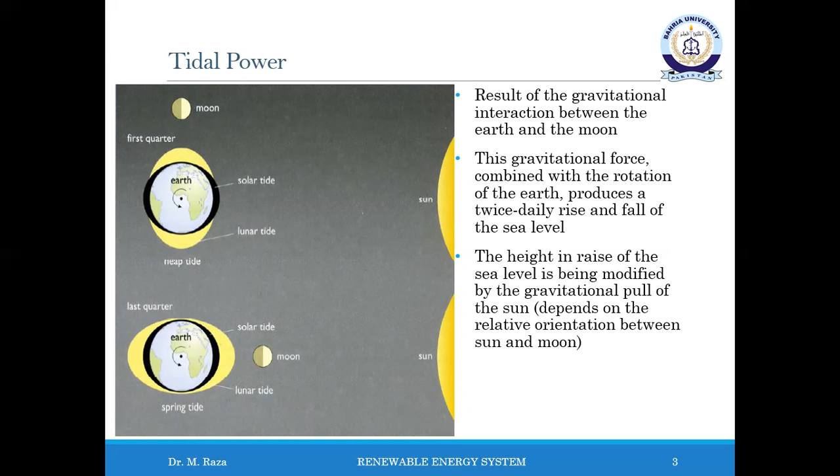There is thus, to summarize, a small centrifugal force and an increased lunar pull acting on the sea facing the Moon, and a larger centrifugal force and a decreased lunar pull acting on the sea on the other side of the Earth. The end result, on the basis of this analysis, is essentially a rough symmetry of forces, small and large, on each side of the Earth, producing a tidal bulge of roughly the same size on each side of the Earth.

In practice, the bulge may differ significantly due to the tilt of the Earth's axis in relation to the orbit of the Moon and to local topographic effects. If Earth were not rotating and the Moon was fixed, then the bulge would remain in the same location on Earth. Relative to the Moon, the bulge stays fixed along the line connecting Earth and the Moon,

but Earth rotates approximately every 24 hours. In 6 hours, the near and far locations of Earth move to where the low tides are occurring, and 6 hours later, those locations are back to the high tide position. Since the Moon also orbits Earth approximately every 28 days and in the same direction as Earth rotates, the time between high and low tides is actually about 12.5 hours.

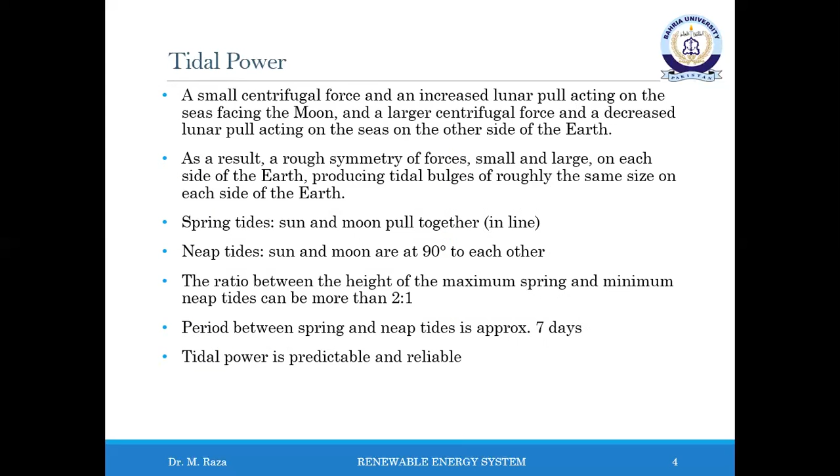The basic physics and engineering of tidal barrage power generators are relatively straightforward. Tidal barrages built across suitable estuaries or bays are designed to extract energy from the rise and fall of the tides. Using turbines located in water passages in the barrage, the potential energy due to the difference in water level across the barrage is converted into kinetic energy in the form of fast moving water which passes through the turbine. The spinning turbines then drive generators to produce electricity.

The average power output from a tidal barrage is roughly proportional to the square of the tidal range. For average power potential calculation, consider a rectangular basin with a constant surface area A behind a barrage and a high to low tide range H. In conventional ebb generation, when the tides come in, the water is freely allowed to flow into the basin. But when the tide goes out, the water in the basin is held there at the high tide level. When the sea has retreated to its low tide level, the surface of the water behind the barrage will be at a height h above the sea level.

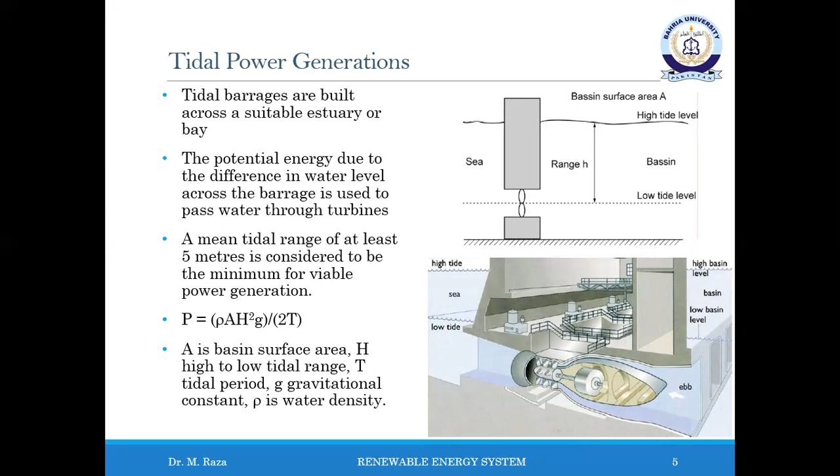Energy can be generated from a barrage in three main ways. The most commonly used method is ebb generation. Here, the incoming tide is allowed to pass through the barrage gate. The water is trapped behind the barrage at high tide level by closing the gate. The head of water then passes back through the turbine on the outgoing ebb tide in order to generate energy. Alternatively, flood generation uses the incoming tide to generate electricity as it passes through the turbines mounted in the barrage. In each case, two bursts of energy are produced in every 24.8-hour period.

During the flood tide, the gates and turbines are kept closed until a substantial hydrostatic head has developed across the barrage. Once the sufficient hydrostatic head is achieved, the turbine gates are opened, allowing the water to flow through them into the basin. Flood generation is a less favorable method of generating electricity due to the effect on shipping and the environment. These effects are caused by the average decrease in sea level within the basin.

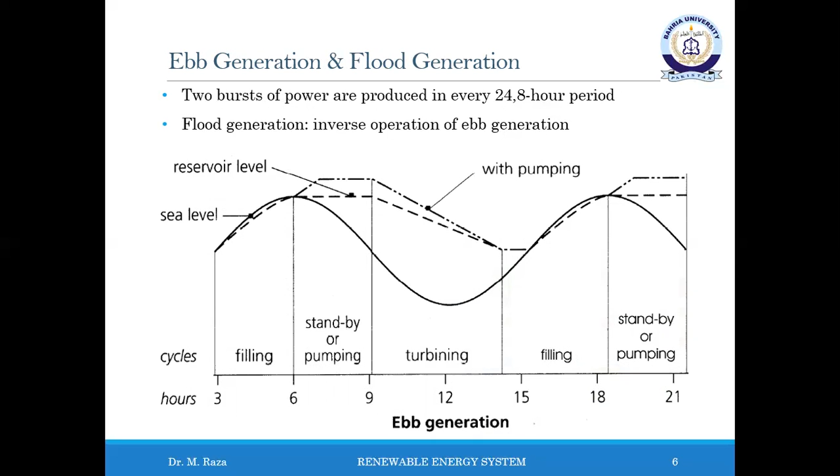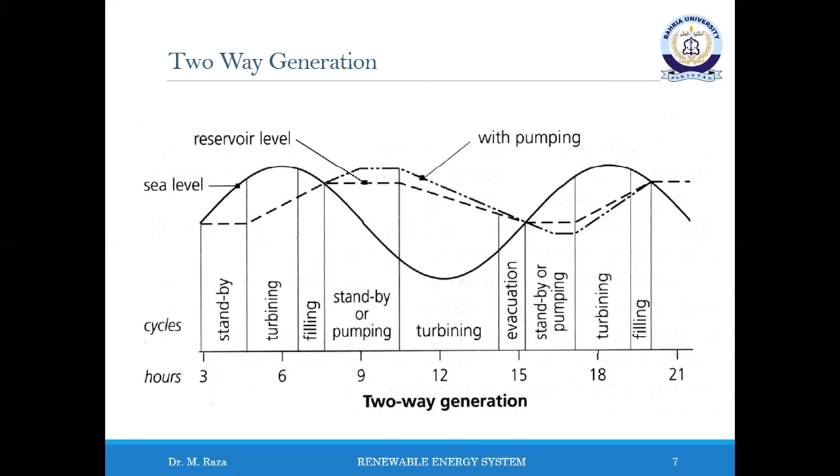Two-way generation has the advantage of a reduced period of non-generation and a reduction in the cost of the generator due to the lower peak power. The electricity produced by a barrage must usually be integrated with the electricity produced by the other power plants that feed into the national grid power transmission network.

With a large, well-developed grid with a large load and many other types of power plant connected into it, this problem might not be too severe, depending on the size of the barrage and the flexibility of the output. The availability of a large amount of electricity storage capacity could also help. Two-way generation on the incoming flood as well as the ebb might offer some advantage, since that would give 4 bursts of power for each 24-hour cycle. But the more complex turbines required add to the cost.

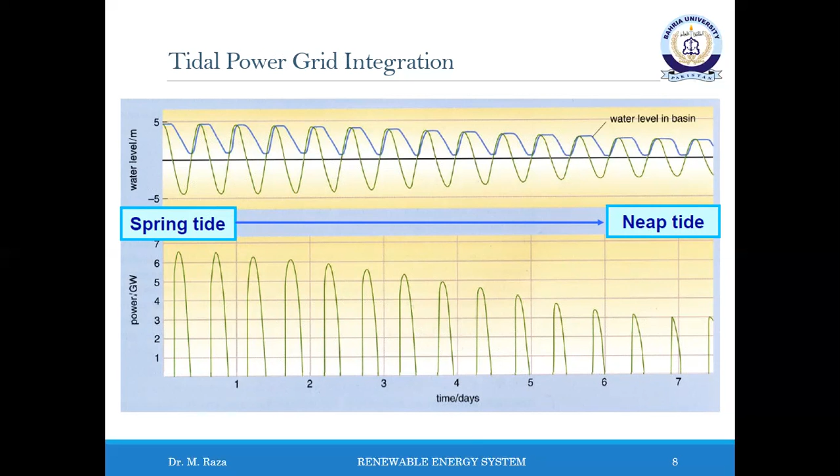The basic technology for power production is well developed, having much in common with conventional low-head hydro systems. A number of different turbine configurations are possible. At La Rance's tidal barrage, a so-called bulb system is used, with the turbine generator sealed in a bulb-shaped enclosure mounted in the flow. As the water has to flow around the large bulb, access for maintenance to the generator involves cutting off the flow of water.

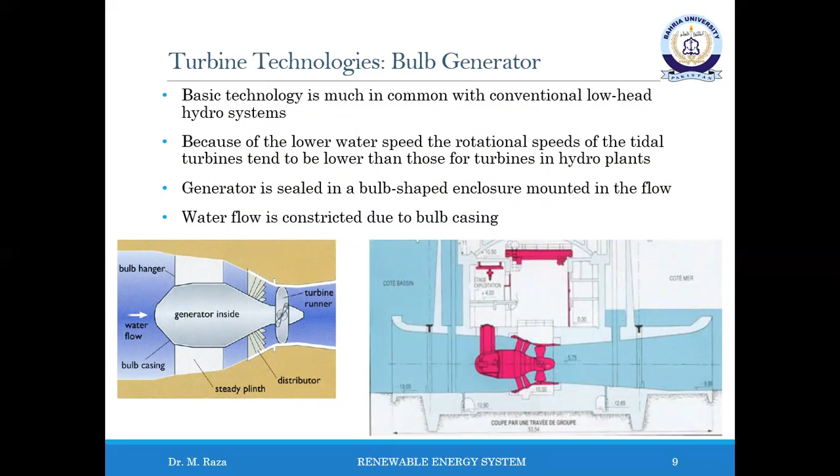These problems are reduced in the rim generator, with the generator mounted radially around the rim and only the runner in the flow. Although it is more efficient than the bulb design because the water flow is not so constrained, this design introduces an extra problem with the sealing between the runner blade and the radial generator.

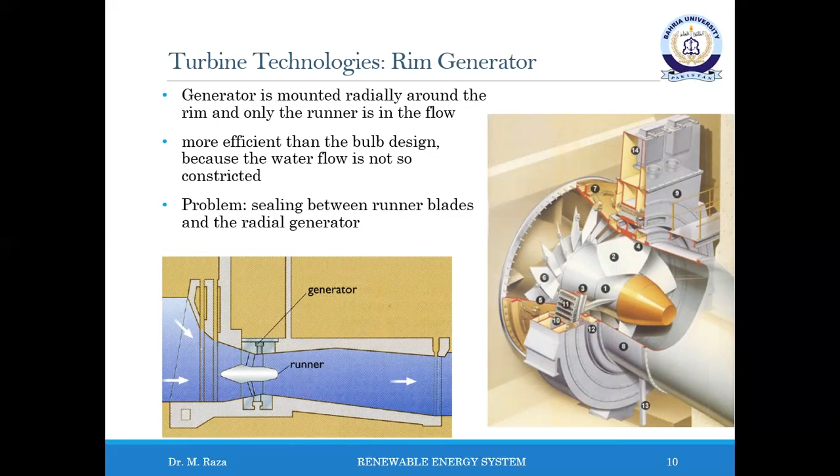Alternatively, there is the tubular turbine configuration, with the runner set at an angle so that a long shaft can take rotational energy out to an external generator. This design also avoids obstructing the flow of water, and since the generator is not in a confined space, there is room for a gearbox, which can allow for efficient matching to the higher speed generators usually used with hydro plants.

The largest turbine of this type installed has a capacity of 25 MW. However, there have been vibration problems in the long drive shaft, and so far bulb turbines have proved to be the most popular with the barrage designer. The rotational speed of the turbines in a tidal barrage tends to be lower than that for turbines in hydro plants, about 50 to 100 rpm, whereas in hydro plants it's 200 to 450 rpm, and therefore wear is also reduced.

Since large volumes of water have to pass through the barrage in a relatively short time, a large number of turbines are required in a large-scale barrage. In a simple ebb or flood generation, this large installed capacity is used only for a relatively short period in each tidal cycle, producing a large but short burst of power, which may not match the demand for electricity.

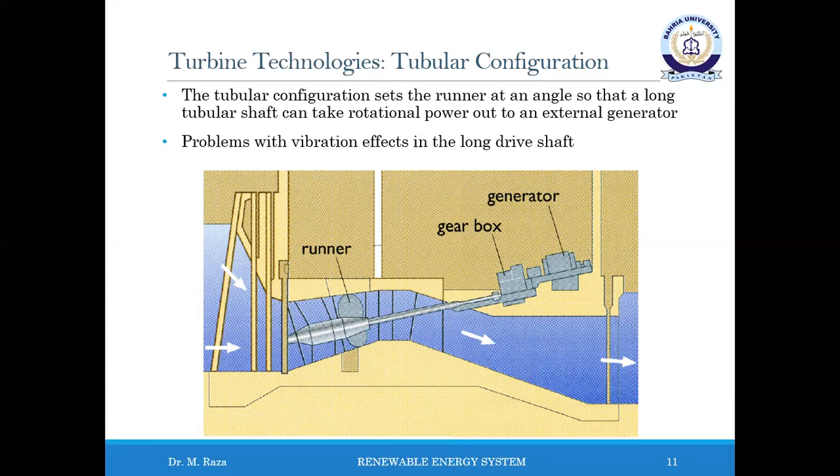However, using reversible pitch turbines, it is possible to operate on both the ebb and the flood in a two-way operation. Reversible turbines are more complex and costly than standard turbines, and although the output will be more evenly distributed over time, there will be a net decrease in electricity output for each phase compared with a simple ebb generation scheme. This is because in order to be ready for the next cycle, neither the ebb nor the flood generation phases can be taken to completion. It is necessary to open the gate and reduce water levels ready for the next flood cycle, and vice versa for ebb generation.

The total power in the tides globally is very large, of the order of 3000 gigawatts. In practice, since there are geographical access and location constraints on siting barrages or other means of obtaining tidal energy, and they also have to be reasonably near to major lines of the national grid, the realistically available resource is much smaller. Some estimates say that the realistic recoverable resource is about 100 gigawatts. Although that is under 12% of the existing global hydroelectricity capacity, it still represents a significant resource.

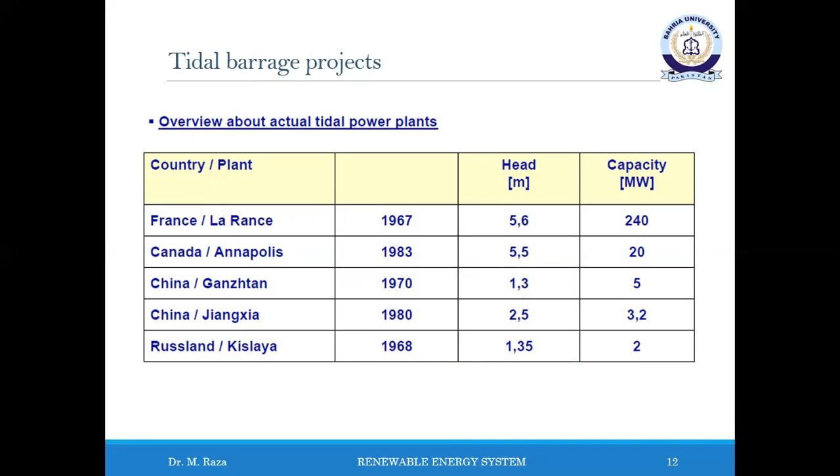A list of a few tidal power plants is shown here. The La Rance tidal power plant was constructed in 1967 in France and has a capacity of about 240 megawatts. There are some other relatively small tidal power plants in China of about 3.2 to 5 megawatts. Note that the capacity of the power plant is large with respect to the small head height. In this diagram, you can observe the design of the La Rance tidal power plant.

The operational pattern initially adopted at La Rance was to optimize the uniformity of the power output by using a combination of two-way generation and incorporating an element of pumped storage. For spring tides, two-way generation was favored. For neap tides and some intermediate tides, direct pumping from sea to basin was sometimes carried out to supplement generation on the ebb.

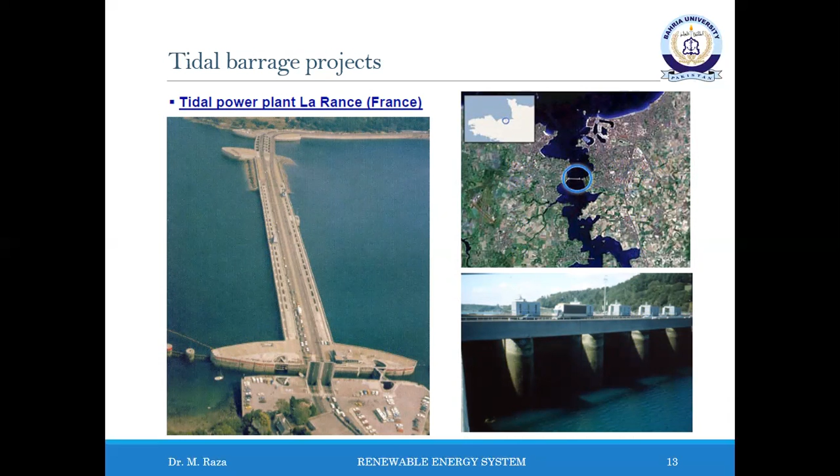The 740-meter long Rance barrage was constructed between 1961 and 1967. It has a road crossing and ship lock and was designed for maximum operational flexibility. It contains 24 reversible two-way turbines, each of 10 megawatt capacity, operating in a tidal range of up to 12 meters, with a typical head of approximately 5 meters, although some mechanical problems were encountered in 1975, which subsequently led to two-way operation mostly being avoided. Overall, the barrage has been very successful.

Typically, the plant has been functional and available for use more than 90% of the time, and net output has been approximately 480 gigawatt hours per year, with in some years significant energy gain from pumping. The construction of the barrage involved building two temporary coffer dams, with the water then being pumped out of the space in between to allow work to be carried out in dry conditions. River water was allowed to pass via gates, but the reduced ebb and flow resulted in effective stagnation of the bay and the subsequent partial collapse of the ecosystem within it. Since construction, exchange of water between the open sea and the creek has restored the ecosystem.

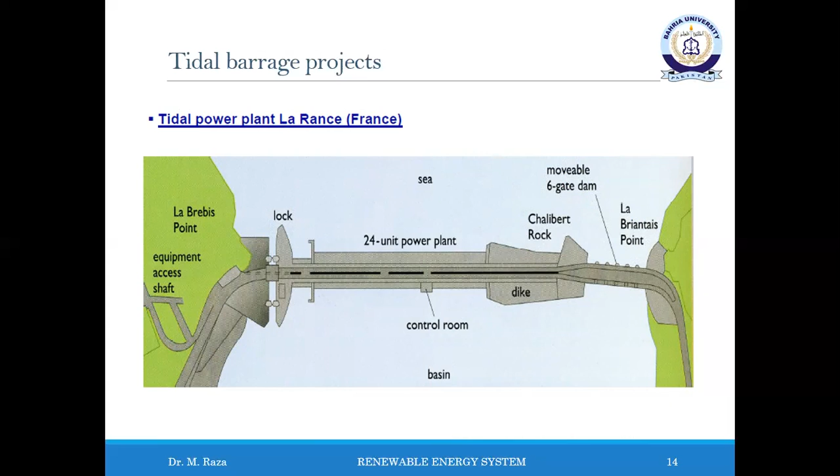Instead of using costly and invasive barrages in creeks to create potential energy head with trapped water, it is possible to harness the energy in the horizontal movement of the tides, that is, the kinetic energy of the tidal ebbs and flows.

In open sea, the speed of the ebb and flow of the tides is relatively low, but restrictions caused by islands, channels, and headlands can significantly accelerate the stream. The enhanced velocity of the tidal stream in these locations concentrates the energy and provides the most cost-effective sites to harness this resource. There are many technologies designed for this, but turbines closely resembling underwater wind turbines have proven most popular with the developers.

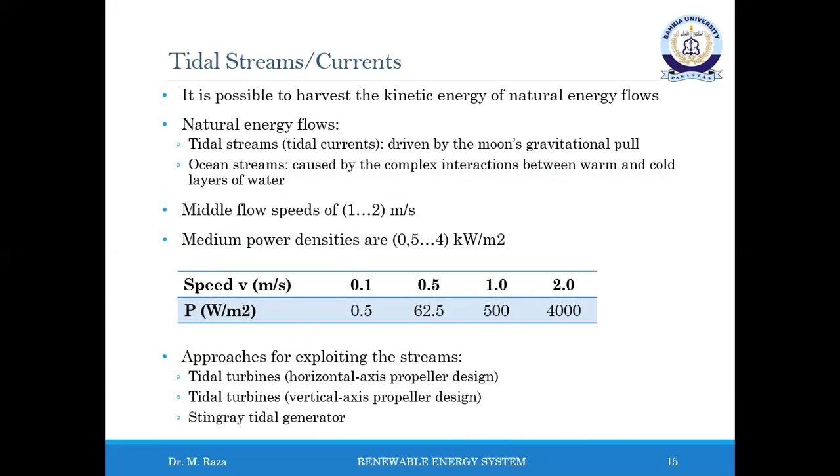The basic physics of power extraction from the tidal stream is similar to that of a wind turbine. That is, half times water density multiplied by rotor swept area and the cube of water stream velocity. A typical horizontal axis propeller design is shown in this diagram. With this structure, turbines can be raised out of the water for easy access.

The most obvious difference between wind turbine and tidal devices is the concentration of energy, due to water being much denser than air. Less obvious is the resulting load fluctuation on the drivetrain and blade from the turbulence generated from the tidal flows interacting with the seabed and other topographical features.

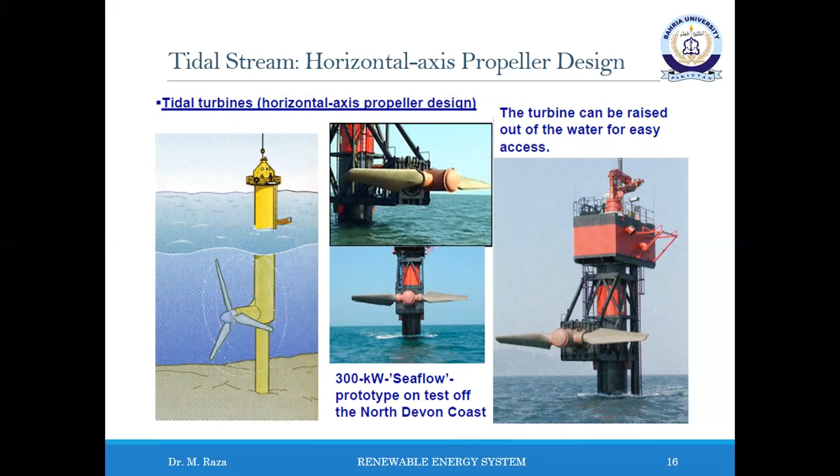Vertical axis propeller type turbines can also be installed to extract the energy from the tidal stream. An EU-funded study has been made of the potential for tidal current generation in the Straits of Messina between Sicily and mainland Italy. This involves installing 100 vertical axis turbines on the seabed at a depth of 100 meters. The concept of a vertical axis tidal stream turbine is the same as a vertical axis wind turbine.

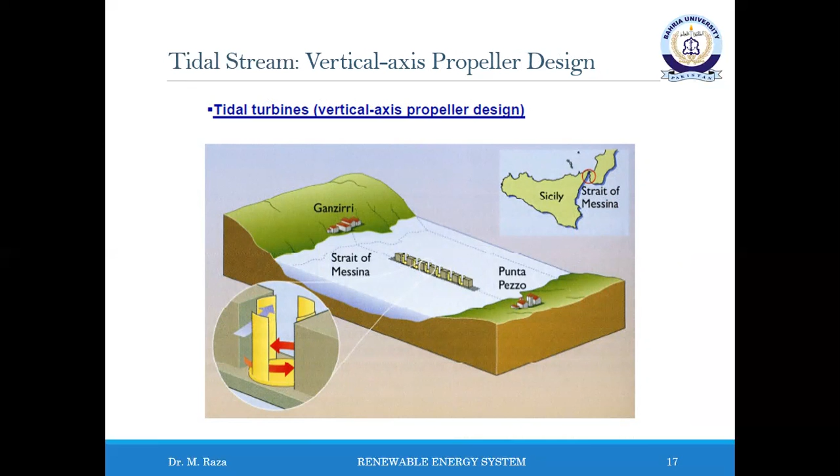Given the relatively shallow depth of most tidal channels, hydroplane type designs are claimed to have an advantage over propeller-like designs in that they can operate in shallower water, with the blade able to traverse a larger cross-section area of the tidal flow than the circular area defined by the rotating blades of the propeller-like devices.

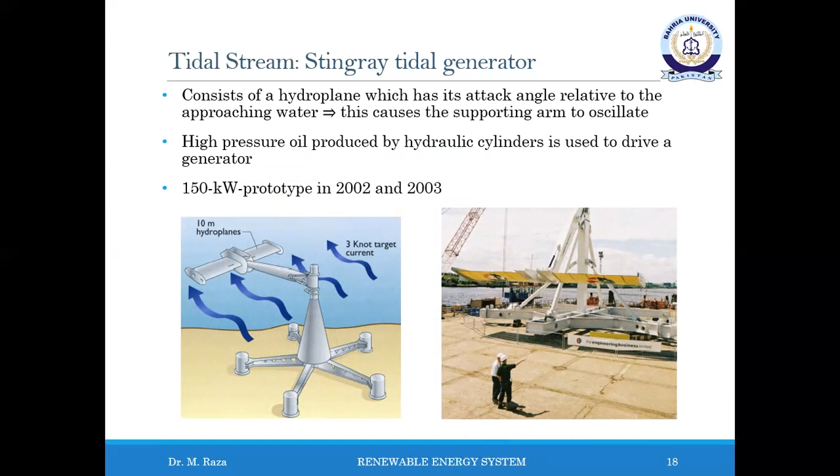The possibility of extracting energy from ocean waves has attracted people for centuries. The modern wave energy conversion schemes have few environmental drawbacks, and the prospects are promising that some of them may make a significant energy contribution. The total wave energy resource is large. However, estimates of its magnitude vary widely as the oceans have not been fully monitored over a long enough time period to establish a reasonable value.

The World Energy Council has estimated the available worldwide resources to be 2000 terawatt-hours per year, if all potential improvements to existing devices are realized. The wave energy potential, for example, in the EU has been estimated conservatively as 120 to 190 terawatt-hours per year at offshore and 34 to 46 terawatt-hours per year near the shore. Here the offshore means deep into the sea.

A rough estimation of technical potential of a few countries is listed here. Denmark has about 2 to 3 terawatt-hours per year of wave energy potential near shore and about 5 to 8 at offshore. Similarly, the UK has a high technical potential of wave power. In Europe, near shore, the UK can produce about 14 to 21 terawatt-hours per year and offshore 43 to 64 terawatt-hours per year.

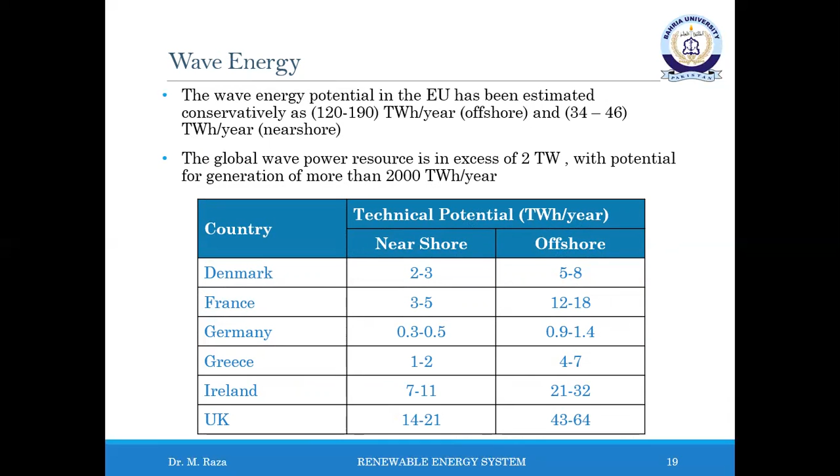Ocean waves are generated by wind passing over long stretches of water known as fetches. The precise mechanism involved in the interaction between the wind and the surface of the sea is complex and not yet completely understood, but three main forces appear to be involved.

Initially, wind flowing over the sea exerts tangential stresses on the water surface, resulting in the formation and growth of waves. Turbulent air flow close to the water surface creates rapidly varying shear stress and pressure fluctuations. Where these oscillations are in phase with existing waves, further wave development occurs. And finally, when waves have reached a certain size, the wind can exert a stronger force on the upwind face of the wave, causing additional wave growth.

Let's start by looking at an idealized wave as shown in this figure. This simple regular wave can be characterized by its wavelength lambda, that is the distance between successive peaks or troughs of the wave. Second, its height, referred to as capital H, the difference in height between peaks and troughs. And last, its period, the time in seconds taken for successive peaks to pass a given fixed point. Waves of greater height contain more energy per meter of crest length than small waves.

Waves located within or close to the area where they are generated are sometimes referred to as wind sea. When wind changes in strength and direction, the resulting wave pattern can become quite complex. Waves can travel out of these areas with minimum loss of energy to produce swell waves at great distance from their area of origin. As the wave travels, there is a systematic tendency for periods and wavelengths to increase, and so swell waves are typically made up of relatively long period waves.

The height and steepness of the waves generated by any wind field depends upon three factors, that is, the wind speed, its duration, and the fetch, that is, the distance over which wind energy is transferred into the ocean to form waves. When the steady wind has blown for sufficient time over a long enough fetch, the waves are referred to as constituting a fully developed sea.

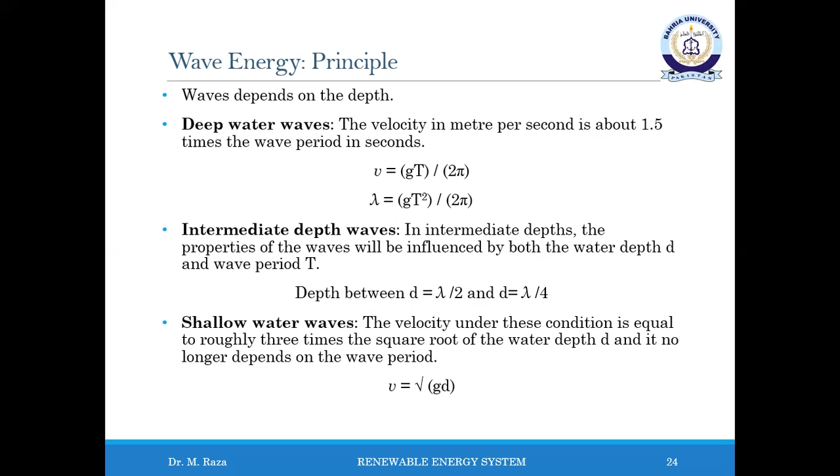There are a few areas in the world where the shoreline is formed by a steep cliff that drops into reasonably deep water. These are the most suitable for shore-mounted wave energy converters because the incident waves have a high power density. But for most coastlines around the world, the near-shore water is quite shallow. Due to the frictional coupling between the water particles at the greatest depth and the seabed, deep water waves gradually give up their energy as they move into shallower water and eventually run up the shore to the beach. This power loss obviously reduces the total wave energy resource. Typically, waves with a power density of 50 kilowatts per meter in deep water might contain 20 kilowatts per meter or less when they are closer to shore in shallower water.

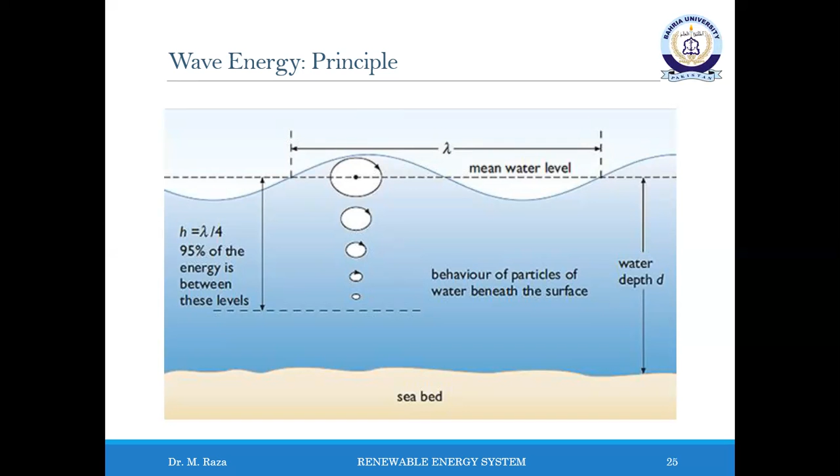To capture energy from sea waves, it's necessary to intercept the wave with a structure that will react in an appropriate manner to forces applied to it by the waves. In a shore-mounted device, the structure is firmly fixed to the seabed and the waves make water move in a useful way. For other types of device, some part of the structure may be fixed, perhaps anchored to the seabed, but another part may be floating and move in response to the wave by pulling against the anchor. In this case, the relative motion between the anchor and the float provides the opportunity to extract energy.

Very loosely chained floating structures can also be employed, but a stable frame of reference must still be established so that the active part of the device moves relative to the main structure. This can be achieved by taking advantage of inertia or by making the main structure large enough to span several wave crests, hence remaining reasonably stable in most sea states.

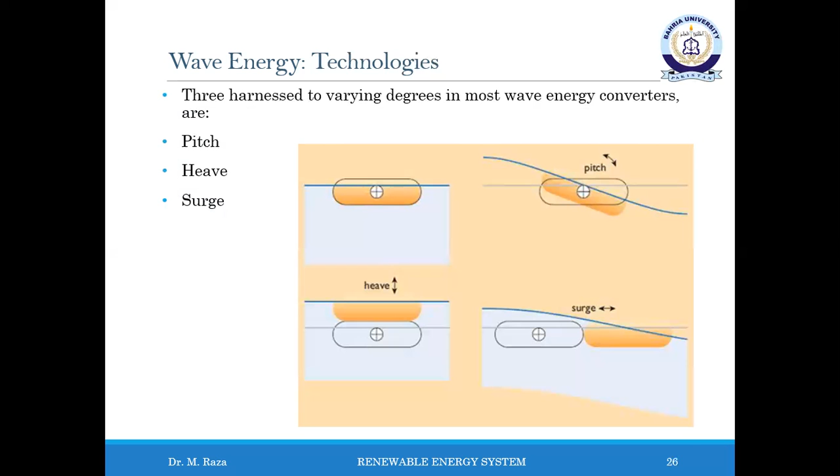Economics demands that a device should survive at sea for at least 5 years. During that time, some of its components will have to execute 15 to 30 million cycles, placing severe constraints on material selection and strain level. A structure designed to operate at a particular wave power density will also have to endure storms with power density 10 to 30 times higher than the operating value.

The physical size of the structure of a wave energy converter is the critical factor in determining its performance. The appropriate size can be estimated by considering the volume of water involved in the upper particle orbit in a wave. In most circumstances, a wave energy converter will have to have a swept volume similar to this volume of water in order to capture all the energy contained in the wave.

The precise physical size and shape of each device will be governed by its modes of operation, but as a rough guide, the swept volume must be of the order of several tens of cubic meters per meter of device width.

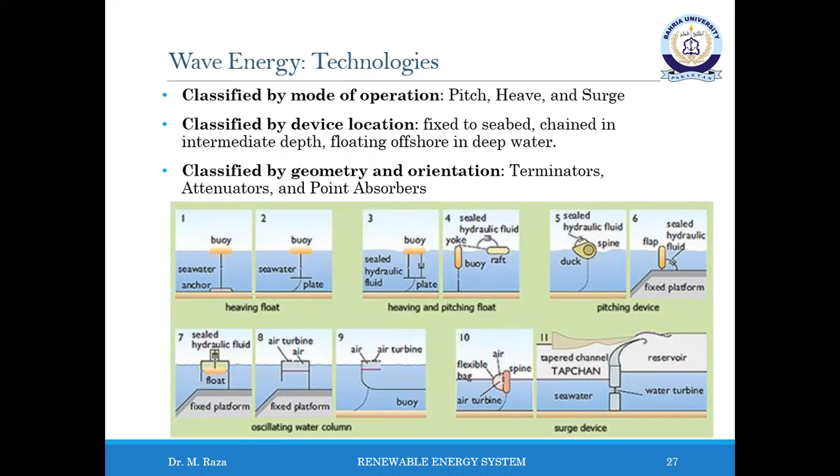There are many different configurations of wave energy converters, and a number of ways of classifying them have been proposed, as shown in this diagram. One approach is to classify by mode of operation. Another approach is to consider the device location. Here the three general classifications are: fixed to the seabed, generally in shallower water; second, tethered in intermediate depth; and third, floating offshore in deep water. Alternatively, the geometry and orientation of the wave energy converters may be used. Here the options are terminators, attenuators, and point absorbers.

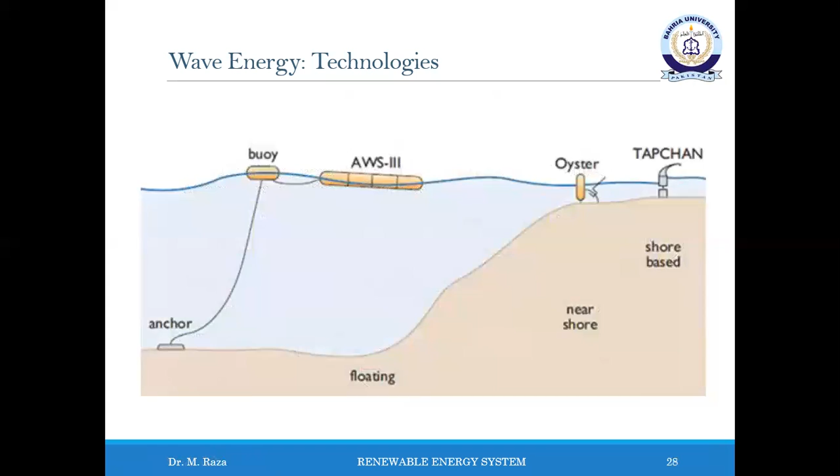Terminator devices have their principal axis parallel, or almost parallel—since a slight angle helps increase the stability of the whole body—to the incident wave front, and they physically intercept the waves, as shown here.

Depending on the depth, a 300-meter long device in a wave climate of 60 kilowatts per meter could intercept up to 18,000 kilowatts of energy. Typically, one third of this might be converted into electricity.

Attenuators have their principal axis perpendicular to the wave front, so that wave energy is gradually drawn in toward the device as the wave moves along it, as shown here. A leading buoy and anchor permit the device to swing around and orient to the principal wave direction.

An array of terminators or attenuators will require sufficient spacing between individual devices to allow them to swing around on their moorings without fouling their neighbors.

A point absorber must have small dimensions relative to the incident wavelength, and works by drawing wave energy from the water beyond its physical dimensions. Typically, being sensitive to waves from all directions, they do not require freedom to orientate to the incoming waves, and so can usually be tightly anchored.

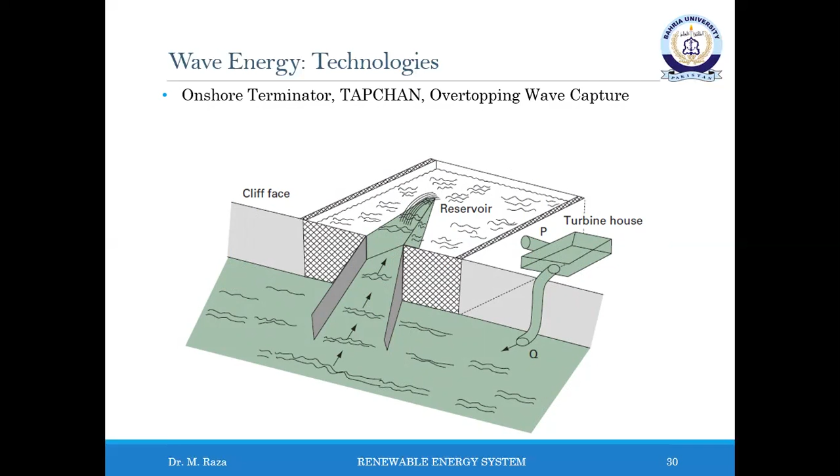Overtopping waves spill over into a reservoir from which water flows out through turbine generators. Low-head Kaplan turbines have been used for the prototype. Waves are reflected and concentrated into the overtopping region by concave-shaped wings that are all part of the floating structure. These also give the structure greater stability, which is important in storms.

After the successful prototype development in Denmark, a 7 megawatt capacity device is due to operate off the west coast of Wales. The aperture of the reflecting wings is 300 meters for this commercial scale machine. The height of the top of the reservoir is designed to catch overtopping from average waves so as to optimize generation through the year.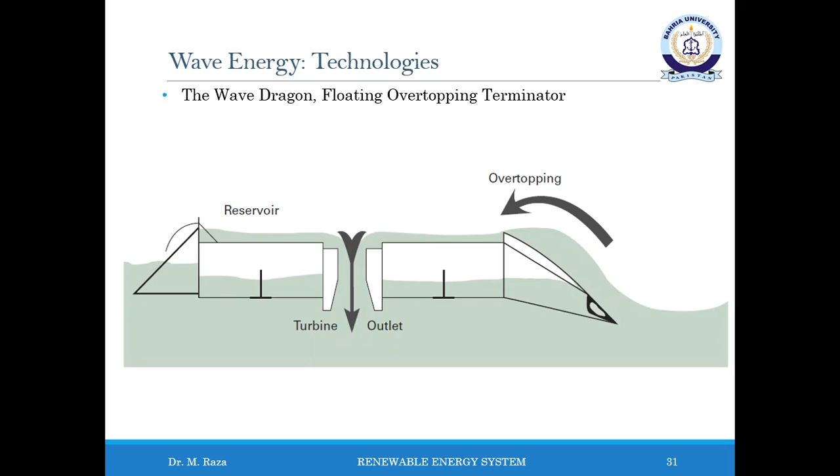An advantage of using an oscillating water column for power extraction is that the airspeed is increased by smooth reduction in the cross-section area of the channel approaching the turbine. This couples the slow motion of the waves to the fast rotation of the turbine without mechanical gearing. Another advantage is that the electrical generator is separated significantly from the column of saline water.

The structure shape and size determines its frequency response, with each form and size of cavity responding best to waves of a particular frequency. It is essential that the characteristics of the turbine generator are matched to the wave movement.

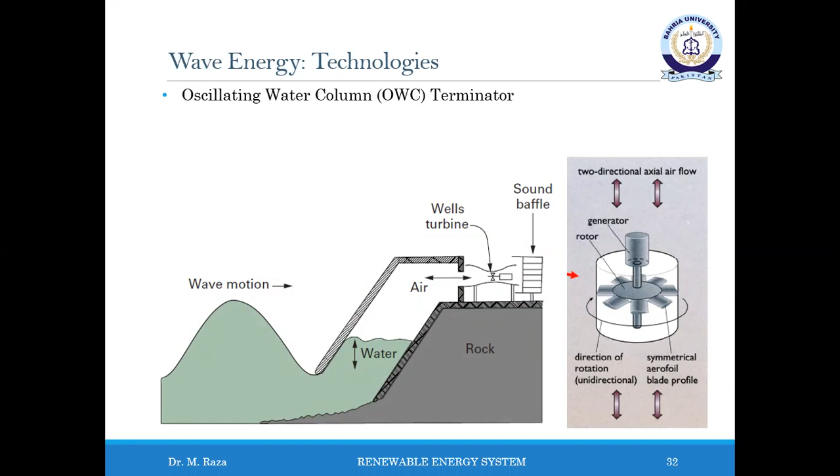Floating wave energy attenuators float on or near the sea surface and respond to the shape of the incident waves. They are anchored to the seabed so they align themselves to the average wave energy flux. The oncoming wave power is absorbed progressively by the device and so lessens, or attenuates, as the wave passes by. Such devices have a length comparable to the sea wavelength and a relatively small width.

The Pelamis machine has several tubular semi-submerged modules connected by couplings able to move with damping in heave, that is vertically, and sway, that is horizontally, in a plane perpendicular to the oncoming wave pattern. The tunable two-dimensional coupling allows the anchored device to have a large capture width, in effect as wave power is absorbed into the device.

Additional wave power is drawn in from adjacent regions, and so the capture width is significantly greater than the device head-on width. The wave-induced motion of the coupling is resisted by tunable hydraulic pistons, which pump high-pressure oil through hydraulic motors via smoothing accumulators. These hydraulic motors drive electrical generators at each coupling, so producing electricity transmitted by undersea cable to shore.

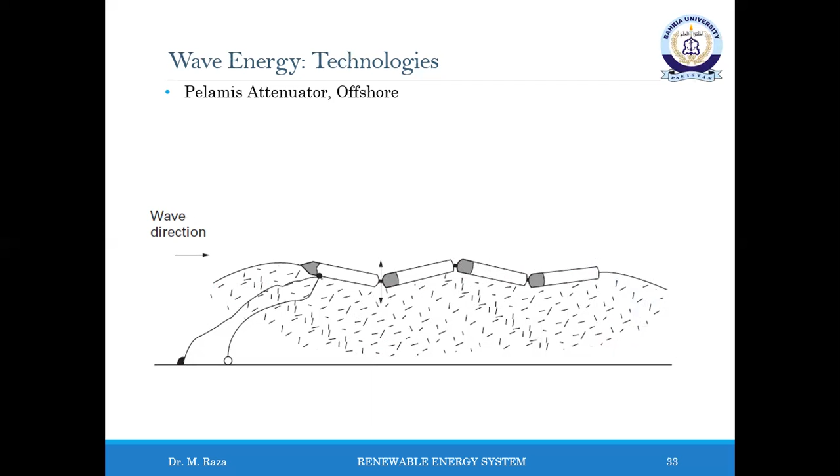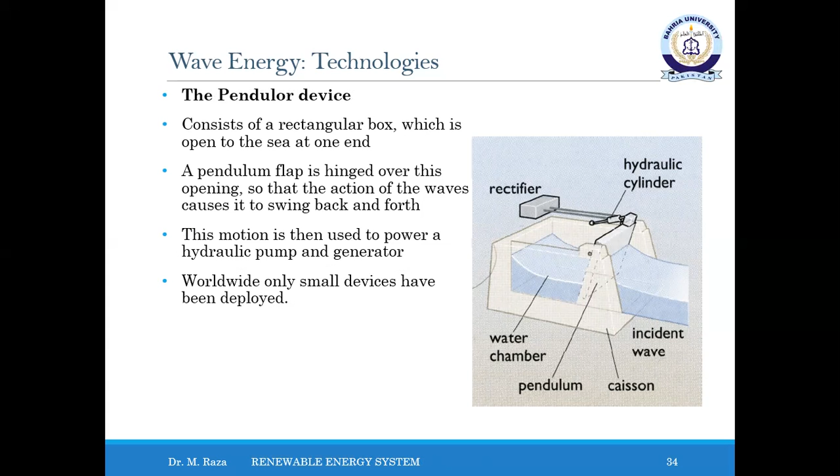Another device to convert wave energy is called the Pendulor device. It consists of a rectangular box which is open to the sea at one end. The pendulum flap is hinged over this opening so that the action of waves causes it to swing back and forth. This motion is then used to power a hydraulic pump and generator. Worldwide, only small devices have been deployed.

The ocean contains considerable mechanical power which can be harnessed, especially in those locations where the resource is large and relatively near to the shore for long periods. In this lecture we have discussed the technologies that can be applied to extract ocean power.